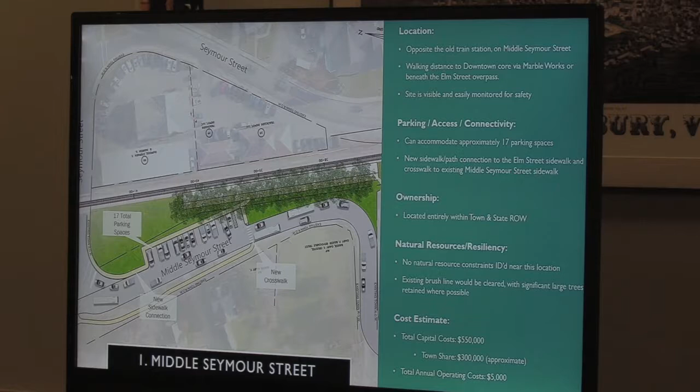Just to orient everyone, here is the underpass on Seymour Street, and this is the former train station here. We were standing here looking in this direction.

We don't see what you're doing — the pointer. Oh, I'm sorry. There we go. That's not good at all. There we go, I don't think this pointer works on here.

We were just able to see it there, though it doesn't show up very well. Let me use an old-fashioned pointer. So the former railroad station is here, Middle Seymour, this heads off to the Marble Works.

What's shown as new here is the platform, a 300-foot-long platform with some plantings behind it, and 17 parking spaces, slightly more than the 13 provided off of Middle Seymour Street. This is fairly close to downtown and walkable. The 17 parking spaces and the platform are all located within public property.

This line shows everything on this side is state right of way. The railroad operates it, but the state of Vermont owns this property. Between these two lines here is the town's right-of-way along Middle Seymour. So this site is, I think, unique among all of them in that there's no private property impacts at this site.

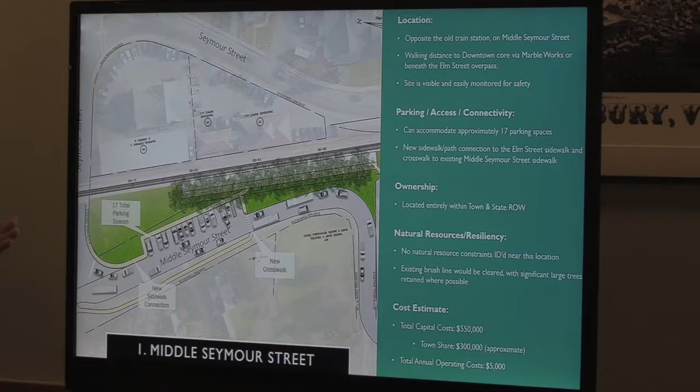In terms of costs, we estimated about $500,000 to $550,000 total for construction. The best guidance from V-Trans is that they will pay for basically the slab of concrete, and the rest is up for negotiation, so it's not definitive guidance. We took a conservative approach, taking the cost, roughly $250,000 for the platform, off the top line. So total capital cost is $550,000, take off the $250,000 for the platform, leaving at most $300,000 for the town share to build the sidewalk, any landscaping, walkways, and so forth.

Why do you need— state your name. Hudson Tilford— why do you need a slab of concrete the size of a football field for a train platform?

V-Trans or Amtrak's guidance actually has 500 feet as their requirement for a platform. The idea is that their trains have five passenger cars, and they don't want to direct people into any one particular car—announce everyone getting off at Middlebury to get on the first two cars. Through discussions with Amtrak and V-Trans, it was okay to go down to 300 feet, which allows 4 of the 5 cars to be serviced. So even with one of the 5 cars, people won't be able to get off at the stop—that's what's really driving the line.

Okay, you had a good answer. Good. Yeah, I think the truth is Amtrak does direct you to exit from different cars, but 500 feet is what they usually have for this.

Gary Baker again. Looks like you're going to have diagonal or straight-in parking there. It could go either way—we showed it works with head-in. Diagonal would be kind of tough; depending which way you orient it, you'd have to turn around at some place to get pointed in the right direction.

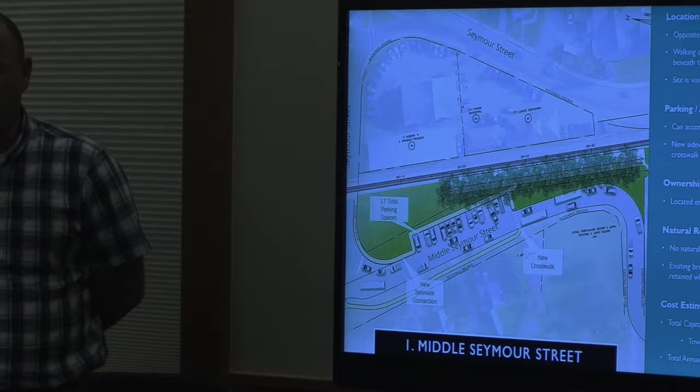Yeah, I mean, you're going downhill and hopefully proceeding with caution. You've got the cars parked there. You could always let the person off at the bottom of the hill or at the top, instead of in the middle of the hill.

That could work too. Another question is, how are people going to get across the tracks? The platform is on the same side as the parking. But what if someone wants to get onto the platform and it's icy, and they let them out on Seymour Street, they're going to come across the tracks? There's going to be a way for that to happen. Not officially. How are you going to prevent it?

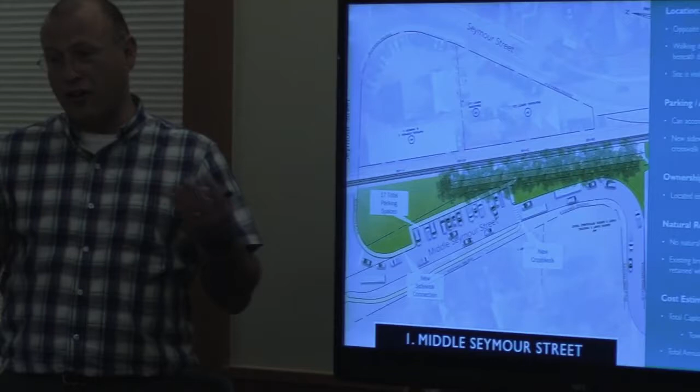I guess just to step back, although this is colored and arguably looks nice, it's a very early stage design, a very concept plan. There's lots of details that still need to be worked out, so we haven't gotten to that level of detail.

And then the walkway for people coming down to get on the platform from the town. Where's that? The walkway from town, like a sidewalk? Yeah, like a sidewalk.

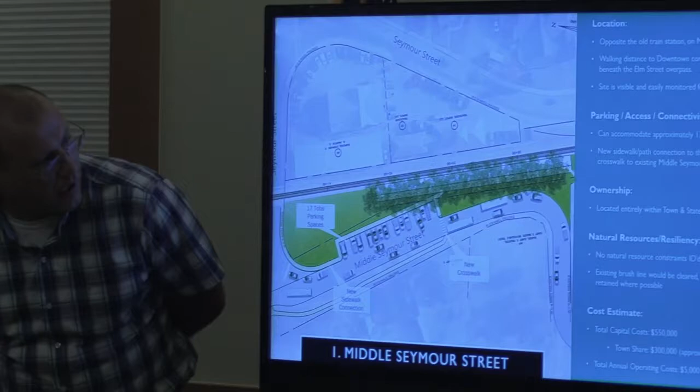That's a good point. We actually at one point did have a sidewalk here, extending along the crossing, a sidewalk that ends in front of Phyllis's house. There was an earlier iteration of this that did have that walkway, but you're basically assuming someone's coming up Seymour Street underneath the underpass and then coming up this way.

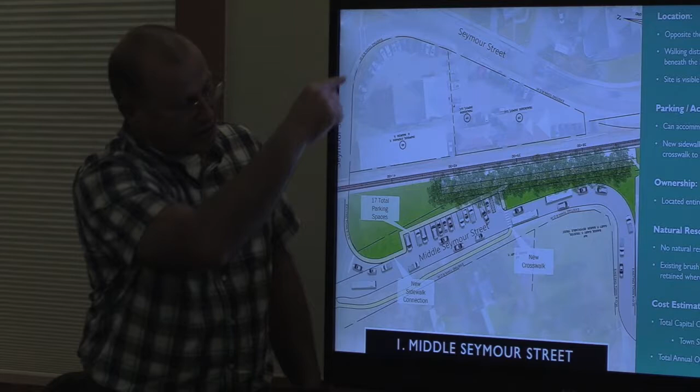Or just getting out of their car and wanting to go into town, or get off the train and walk to town, the most direct route, and they could go this way, up through the Marble Works. Yeah, that's a good comment. There's no public way shown to do that, as this is shown now. But that's a good point.

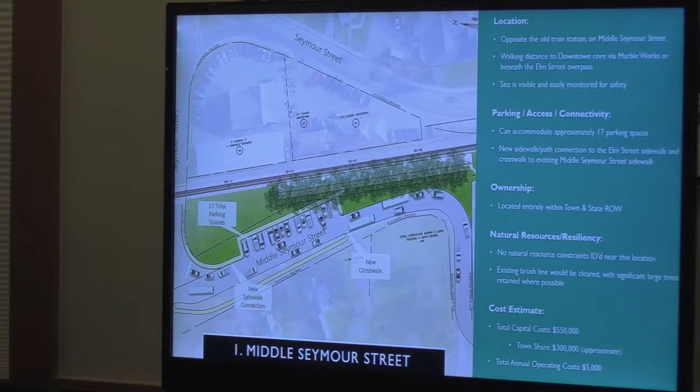And there's an old path there that goes across two people's private property. But I'm sure they're not going to want to train people coming up through there, no pun intended.

Yeah, sort of a procedural question. Do you want us to ask questions as you go through each site, or do you want to go through them and then circle back? I prefer the latter, if we can get through the four, just so you can see the context of all four. I have one question, but I'm fine with holding it. Okay, thank you.

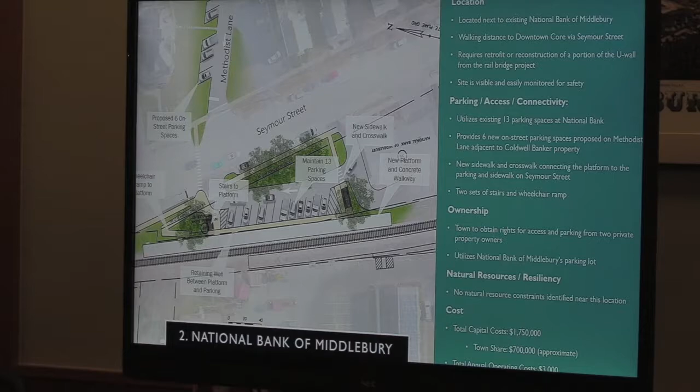As I mentioned before, the trains would be coming generally off bank hours, so 7:30, 8 o'clock in the morning and 7:30, 8 o'clock in the evening. So in theory, there's some synergies with the need for that parking. At the same time, it's a private business that owns and controls that parking, so there's certainly need for additional conversations with the owners there.

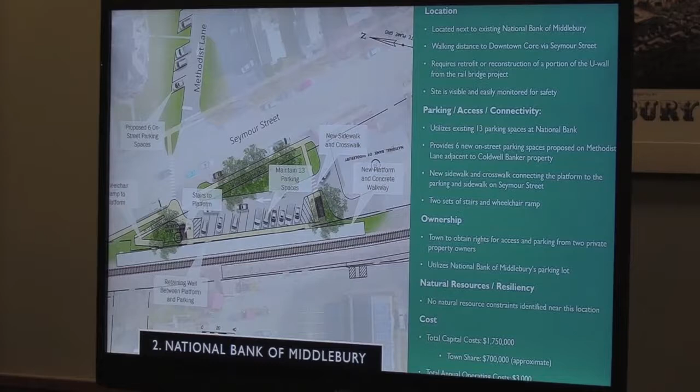Will you reiterate the costs for that, like you did for the other site? Oh, I'm sorry, yes. Just noting some things here, I'm sure everyone can read the details. This is obviously closer than the first site to downtown, so that's an attribute of this site. Proximity to downtown was ranked as one of the highest attributes of a good site, so this is fairly close to downtown, depending on where you put the pin, and fairly close to most destinations. The 13 spaces here and 6, you could arguably say 19 spaces.

The ownership we talked about, privately owned ownership here. And then the cost, this is cut off for some reason, but the overall cost is 1.75 million. This is by far the most expensive because of the need, as part of the tunnel project, to put in U-shaped walls through here. The U's are not wide enough to accommodate, if you can envision a U with the tracks in them, the wall is not far enough back to accommodate this 12-foot wide platform, so that U would either need to be expanded or retrofitted to accommodate the platform.

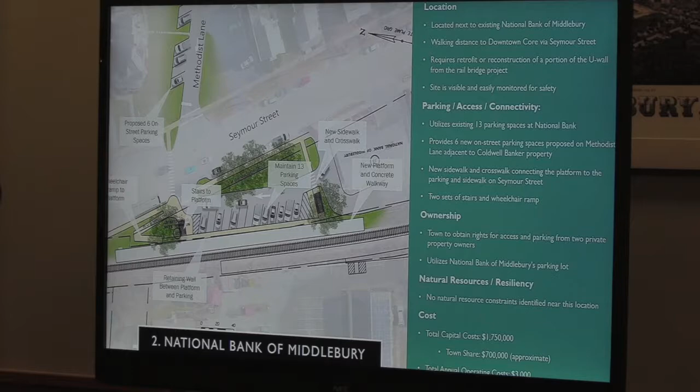I'm sorry, could you repeat that? Yeah, so if you envision the U that's going in here, these precast concrete U-shaped structures that are going in with the tracks, in cross section. The tunnel? Well, the top of the tunnel comes off over here, so it's just the bottom half of the tunnel, because the track's being lowered. Yes, so they're lowering the track, and the tunnel part is the two U's coming together. You've got the tunnel, here we just have the bottom, and so then the tracks are set in that U. There's not enough room on either side of the U to fit the platform in.

And so, it's fairly detailed. What we have assumed, though, in terms of the town cost, is that V-Trans would bear the cost of any retrofit, redesign, or reconstruction of the U-wall there. So I'm happy to go into detail, but it's kind of off the books in terms of cost to the town. And just to clarify on the cost, this is not actually acquiring the property from the bank, it's just getting usage for it. Correct. And this line here, this black line, is the edge of the state right of way, so the platform in this case is all within the public right of way.

Directly in front of Coldwell Banker Real Estate, there are 6 parking spaces straight in. Do those belong to the town, or do they belong to the building? To my knowledge, they belong to the building. I drove by earlier this afternoon just to scope it out, and at 4 o'clock in the afternoon, there's 6 unused parking spaces directly in front of Coldwell Banker Bill Beck. It might get filled up through the train station.

Just to clarify, are you talking about spaces in front of the building or behind the building? No, directly in front of it. Oh, I thought you were talking about the behind, on the Seymour Street side. That I don't know. Directly across from the bank's parking lot. Yeah, that I don't know.

Gary Baker again, who owns those 6 spots on Methodist Lane? That's a one-way street now. Yeah, so they would need to be constructed. I know, but who owns the land? I believe this is still within the town's right of way. I don't recall if we looked at the property lines here. I think it might encroach a little bit, so I think you'd have to acquire something there. Acquisition, yeah, I would think. It would be one of the one-way streets, if you could fit two ways.

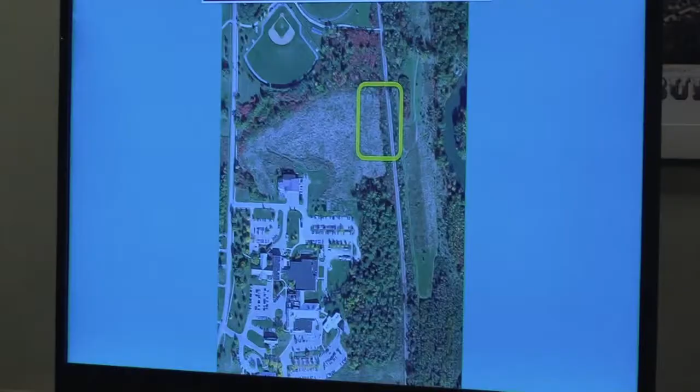In terms of safety perception, it's always good to have eyes on where people are. This is not necessarily the most visible location, so there may be some concerns over safety. That said, it's also kind of underutilized space right now, not a very high value parcel as maybe some of the other locations may be.

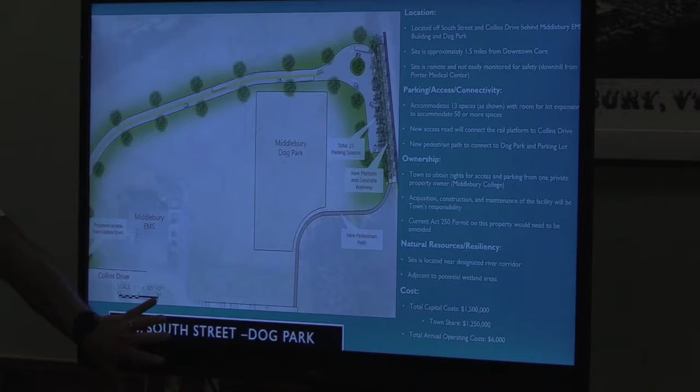Moving on, the last site here is what we call the dog park site. This is the Porter Medical Center, the college's ball fields, so it's essentially the field. The dog park sits about here, just off along the tracks adjacent to it. So here we are, the medical center is off the screen here, the dog park is shown here. It's a fairly long drive to get down to the parking lot.

We're showing 13 parking spaces here with the platform turnaround for drop-offs, bus or vehicular drop-offs. And then rather than a full concrete sidewalk all the way down, we're showing a pedestrian path of stone dust to get up to the parking lot for the medical center.

I think this one is definitely the farthest from downtown. This property is all owned by the college. There have been some discussions with the college about potential cost sharing. I've talked to the college since the survey was prepared, and they're interested in hosting. They're possibly interested in creating some parking for their own needs, so there may be an opportunity to cost share here. They'd also be willing to provide a security sweep and a blue phone to improve security concerns at this location. So those are the newest news.

This one has, of the four sites, the least constraints in terms of space. We actually had an earlier version with a few more parking spaces, so that's an option. As shown here with 13 spaces, it's still fairly expensive because of all the infrastructure, the roadway itself, climbing down the grade. We're showing a $1.5 million total cost, about $1.25 million for town costs, mostly the infrastructure, the roadway, the turnaround, and all the asphalt going in. This one also has the highest operating cost, we estimated about $6,000 a year.